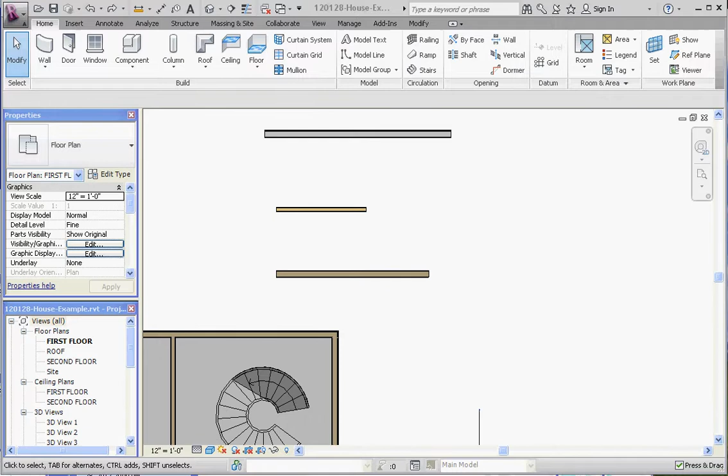So use constraints when you need to, and the most basic constraint you could use is dimensions, and we are going to be using a lot of those. Let's go ahead and finish this model up and make all of our walls 16 feet.

If you click on a wall and it turns blue, it gives you the ability to take a dimension and change that. We're going to make that 16 feet. There are some constraints in this, and I don't know of any, so we're going to go ahead and delete and remove that constraint. So I'll make that a 16-foot wall.

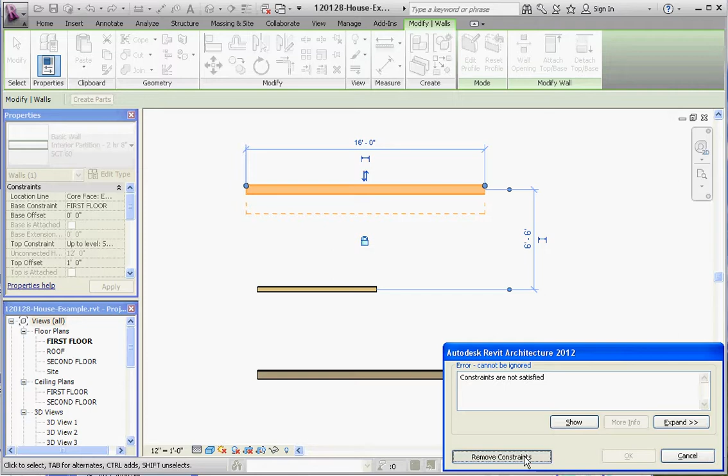Another way to make that wall 16 feet, or another wall, is to stretch it out until you get a dimension that says the dimension you like, which is that one. Let's make that dimension permanent as long as we have it visible by going to the dimension symbol and clicking on it. And whoa, it's teeny tiny.

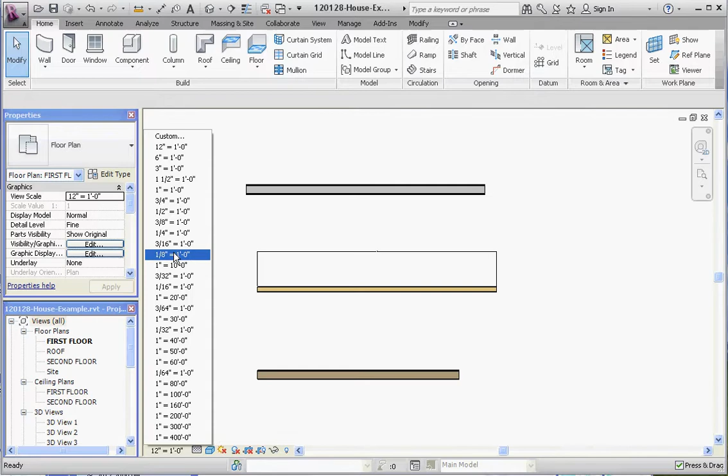So let's go down here. I was playing with this earlier, so down here in my view control bar, my scale is actually 1:1, 12 inches equal to a foot. Let's go ahead and make it 1/8 of an inch equal to a foot. That's a little bit more common, a more common architectural scale, and I think it's the default scale that it starts you out with when you first start a model. So that looks a little bit better.

The dimensions are readable. We'll make that one permanent, and this one permanent. And this one, let's go ahead and change that just by typing in 16.

Okay, a couple things we could do here. Now we want to constrain these so that this edge of this wall is collinear or coplanar with that edge and that edge. So let's use this as our base constraint.

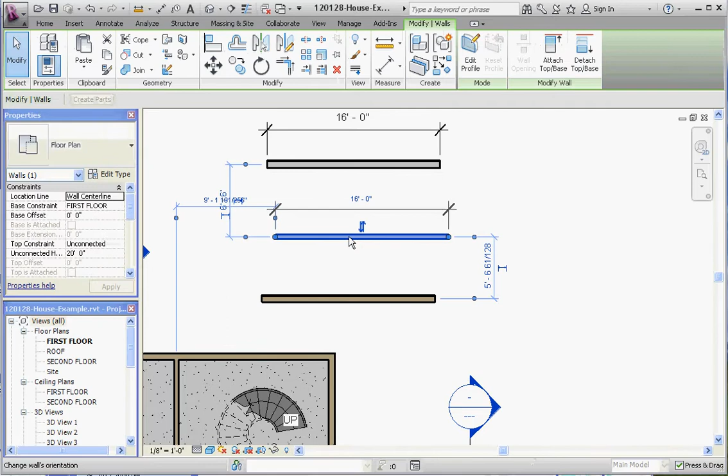Let's take this and we'll move it. And if we move it, it should be able to pick up that polar tracking on the left-hand side, the light dash blue line. We're going to keep that there and lock it.

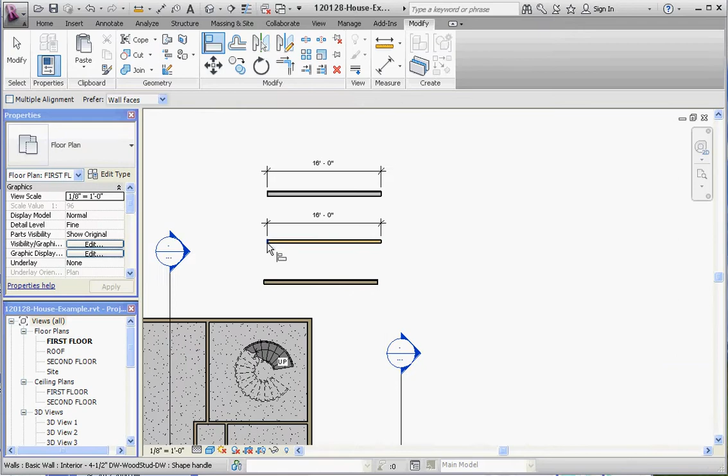Another way of doing this is to go to your Modify tab on your ribbon, go to your Align tool, and click on that. First thing you want to do with your Align tool is click your static element, which is going to be this. Your dynamic element, which is going to be that. And it's going to move it into place, and we're going to lock it.

Now this is what I mean by constraints, because sometimes we wanted that 16-foot dimension on this, which is no longer there. If you were to click on that, it's now like 15 feet and, what, 89 and 256 of an inch. Yikes. So you've got to be careful about it.

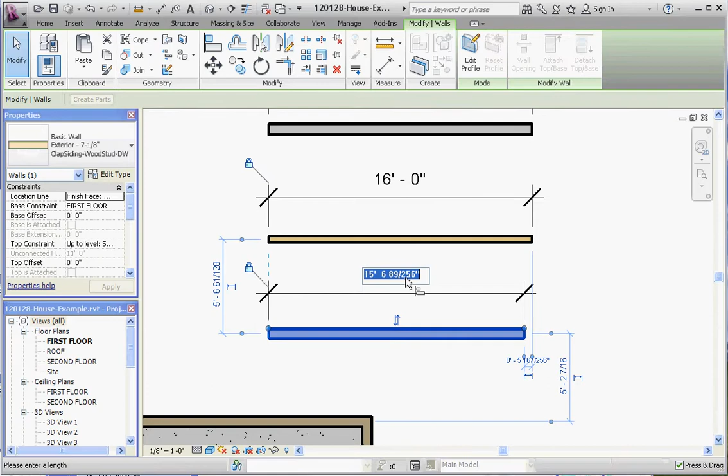Let's just make that a permanent dimension, select it, and see if we can make that 16 feet. So it does stretch everything else out, and stretch these out too, so that's kind of ugly. So let's click on this, make that 16 feet. Here's how these constraints kind of conflict with each other.

So how are we going to fix that? Well, I'll show you. We're going to use this as our static element when we make an Align tool modification to it, and click on that one and that one after that, and then they all should be at 16 feet. So let's give that a try.

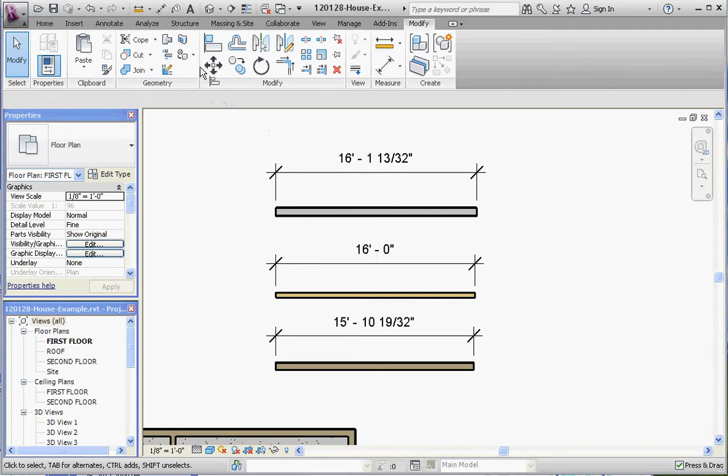Our static element for our alignment — click on this, this is the one we're going to change. Lock it. Click on this one, this is the one we want to change. Yeah, let's get out of that tool because I think it was going to go ahead and change that one.

So let's go back to the Align tool. That's our static element, that's our dynamic element, and then we're going to lock that.

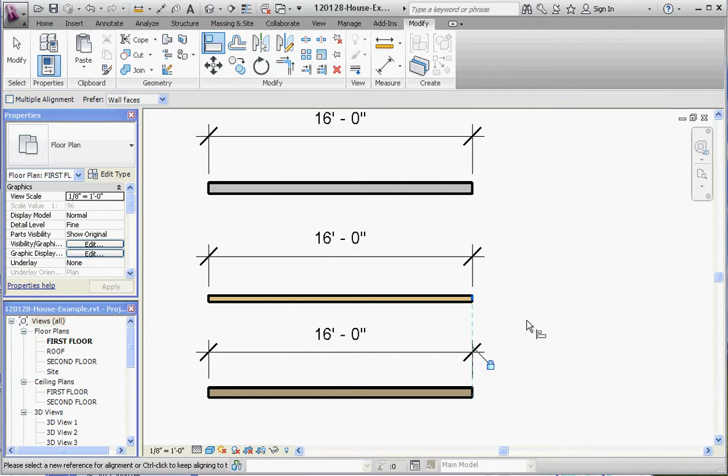One last thing we need to do is make sure that these walls are 6.5 feet from each other. Alright, that's already set at 6.5 feet, so that's okay. And this one, not quite at 6.5 feet. So let's go ahead and do that, make that a permanent dimension, and that should be locked — that should be locked.

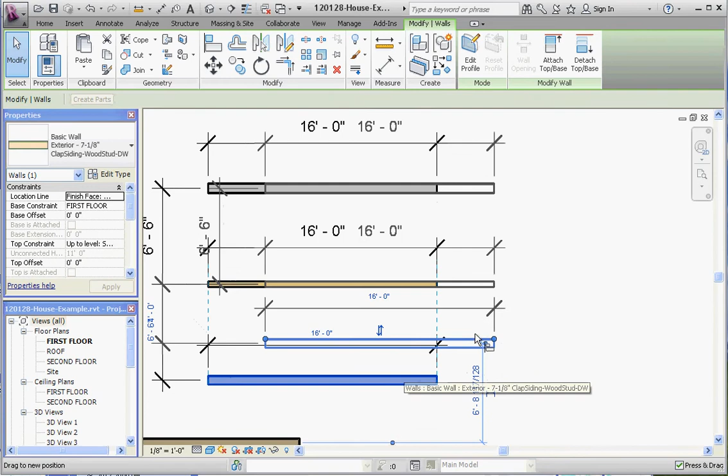And to test all this, take a wall and move it, any wall, and they should all move as a block. And this one didn't — for some reason this didn't lock, so let's go ahead and change that. We'll make that 6 feet, 6 inches.

Let's bring that dimension a little bit closer to the other one. And when you click on that dimension, you have the ability to padlock it. Let's click on this dimension — that should be padlocked. That dimension, that should be padlocked so that doesn't change. That should be padlocked. That should be padlocked. So now, if we click on any wall, all the walls should move together in one fine block.

Okay, that's the requirement for this assignment. Let me know if you have any questions about that. We'll talk to you soon.